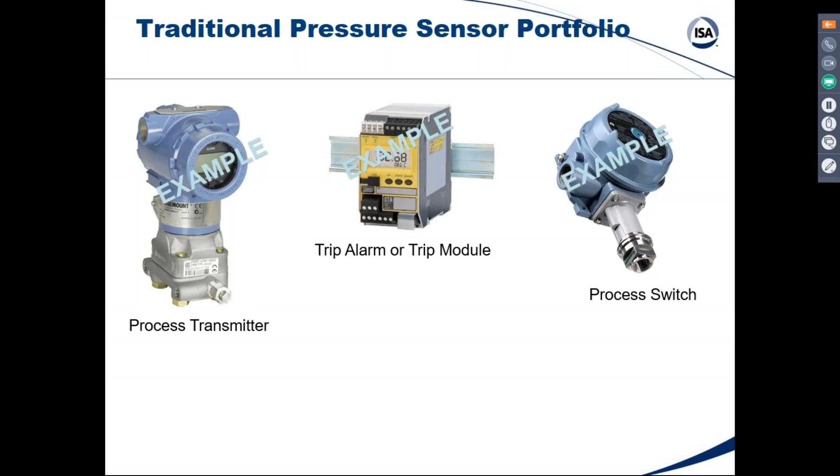So we might begin this discussion by giving some examples of the traditional sensor portfolio. It might be a process transmitter, it might be something like a process switch, it might be a trip alarm or a trip module. So you can see in just these three products alone the building blocks of a critical loop. We won't go into the final elements because our focus here is on the sensor part.

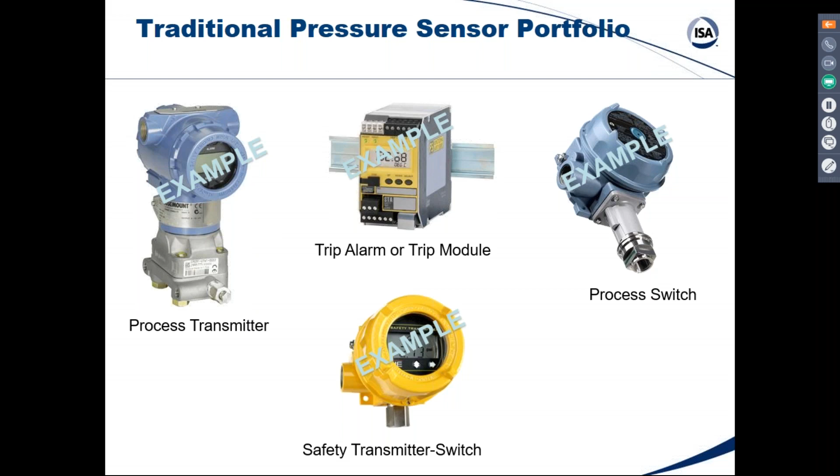Today's topic specifically is about this safety transmitter switch, or this hybrid. What you call it has been something of a head scratcher too, because customers are usually thinking either of process transmitters or switches, not the combination of one in the same kind of footprint. I think several years ago one of our competitors came out with a product like this and called it a hybrid, and it seemed to be a good way of representing it.

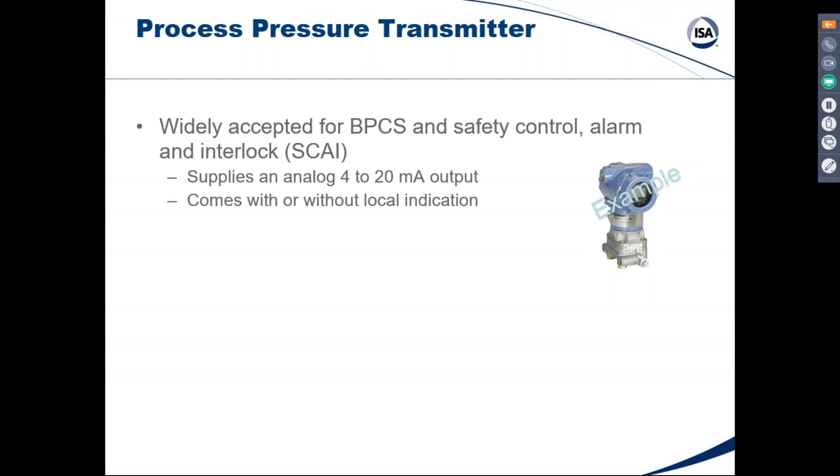So if we look at just the process transmitters, they're obviously widely accepted in basic process control and in this area called SCAI, safety controls, alarms, and interlocks. They supply a 4 to 20 milliamp output as the input to the critical loop. They come with or without indication, and the interface or integration is dependent on that central logic solver. The attention to setting it up, commissioning it, making sure that configuration changes are intended and not unintended, and the issue of proof testing is something you have to take care of.

They're SIL capable—if you look on the safety automation equipment list, for example, that Exida hosts, you'll see a lot of process transmitters up there. They've been around long enough so they meet this criteria that the functional safety standards have defined called prior use, but there are certified versions as well. The newer versions of these process transmitters have dealt with the issue of frozen impulse lines, because that used to be a concern—and in fact it's still a concern, because there's a huge installed base of transmitters that still can't detect frozen impulse lines. You get a frozen 4 to 20 milliamp signal, and it can be very dangerous.

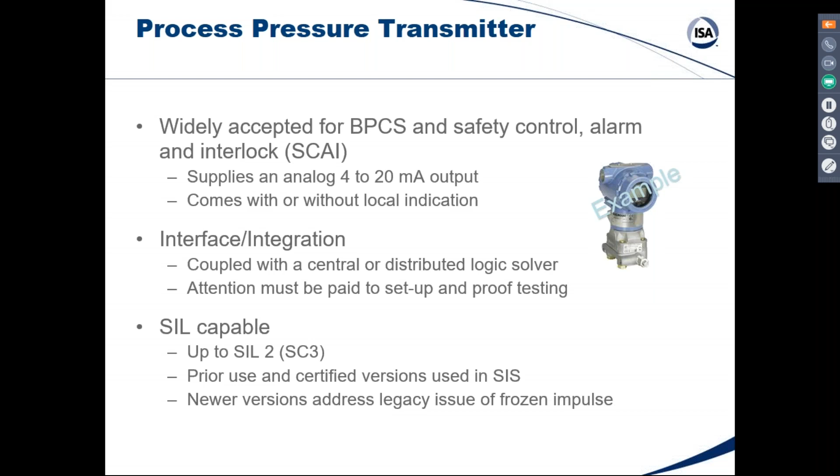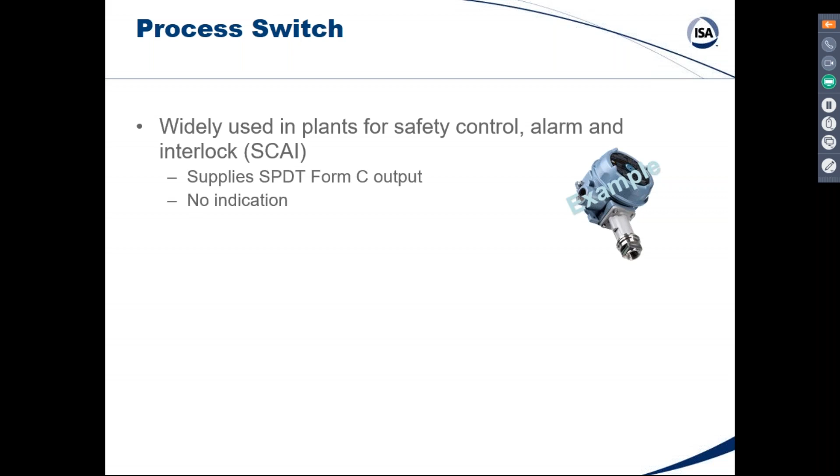All right, so now we go to the switch. Again, widely used in safety control, alarm, and interlock, not as much in basic process control. In this case, a Form C output, single pole, double throw, using traditionally a micro switch, with no indication.

The interface, the integration is discrete to the logic solver or to some final element directly, because it has the capacity to handle the final element kind of switching. Same issue with setup and configuration—it takes attention to detail. In this case, a few more wrenches, and probably an equal amount of time, if not more.

These devices are SIL capable now. Like many devices, electromechanical and solid state, they have met the requirements of the functional safety standards, which combine not only the manufacturing process and the development process, but also the implementation of the design and development. So you'll see SIL certified electromechanical switches now on that automation equipment list.

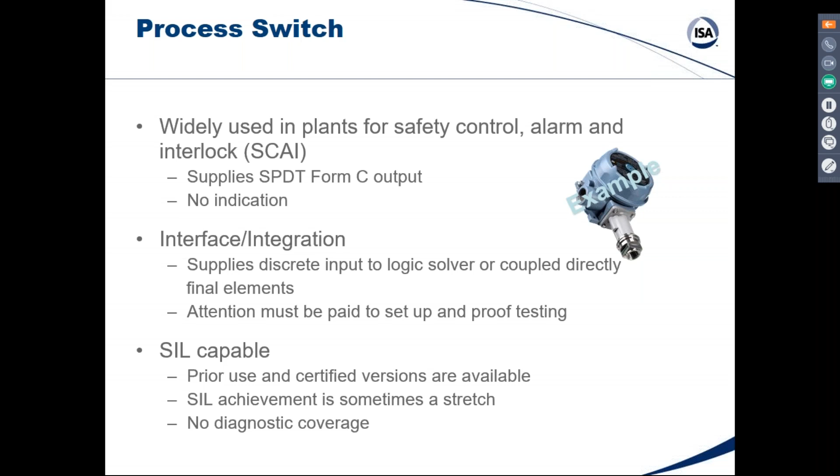As far as this trip alarm, trip module, same thing—SIL implementation using sometimes analog inputs and digital outputs with or without indication. Those safety trip alarms require more environmental protection generally, so it's got a different environmental profile than does a process transmitter or those switches.

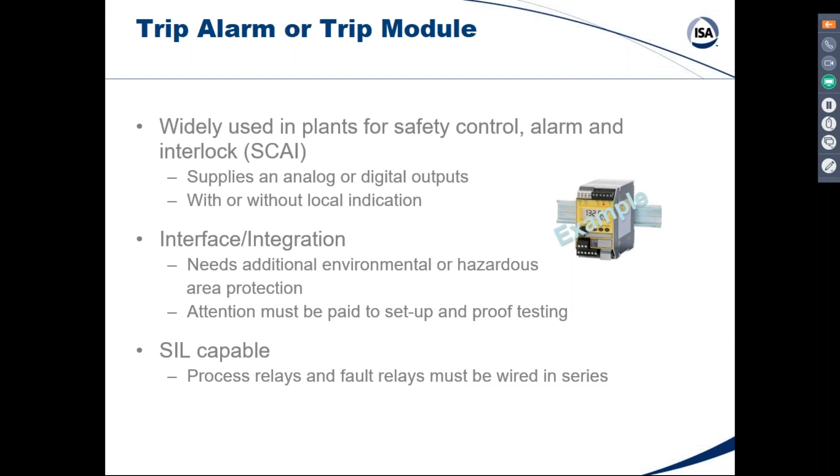And they are SIL capable, with a footnote—you've got to monitor that process output with a diagnostic output. And it's not automatic. It's something that has to be implemented.

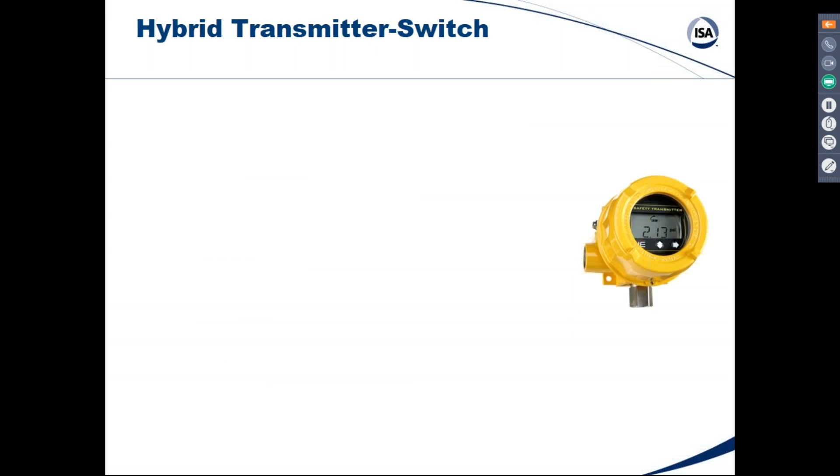Okay, so now we move to the topic today, which is this hybrid idea that you could squeeze some of this together in one footprint. This is, as best I can describe, an emerging niche. Not all customers will implement a device like this in a full-blown safety automated safety instrumented system. So this word niche has come up a lot, and I've heard big operators use it to describe ways in which they think this can be used very effectively to protect certain loops.

It combines the functions of a transmitter and a trip alarm. It does so with indication. It can be coupled to the logic solver, or it can be powered externally. So it's got that flexibility that a process transmitter doesn't.

It is SIL capable. So the one you're looking at right there is certified to SIL 2 with SIL 3 capability. And we've gained this prior use acceptability with this particular design as well—so that route, what they call route 2H. And it has automatic self-diagnostics. So the manufacturers of hybrids are paying attention to this imperative for diagnostic coverage.

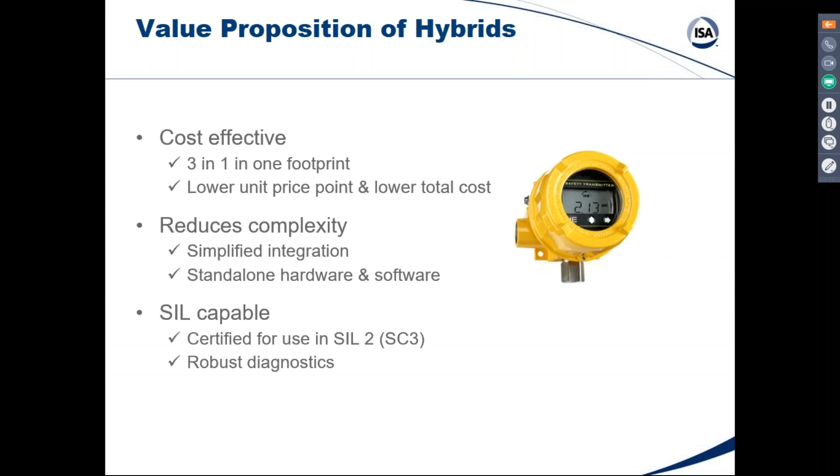And same thing with the users, right? They want some objective way of implementing stuff, sometimes quickly, sometimes without the type of prior use validation that is demanded. And so being able to lean back on a device that's been certified to the functional safety standard is an important path.

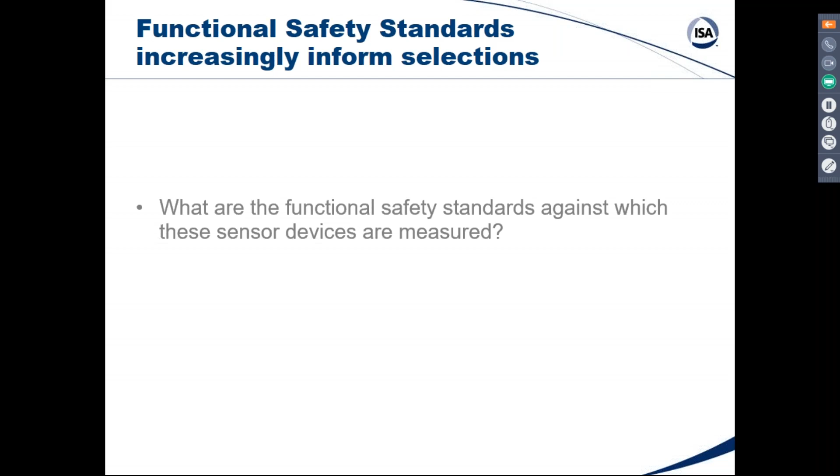Okay, so let's just talk about that for a minute—the functional safety standards against which these devices are measured. So it's both a qualitative and a quantitative assessment, really.

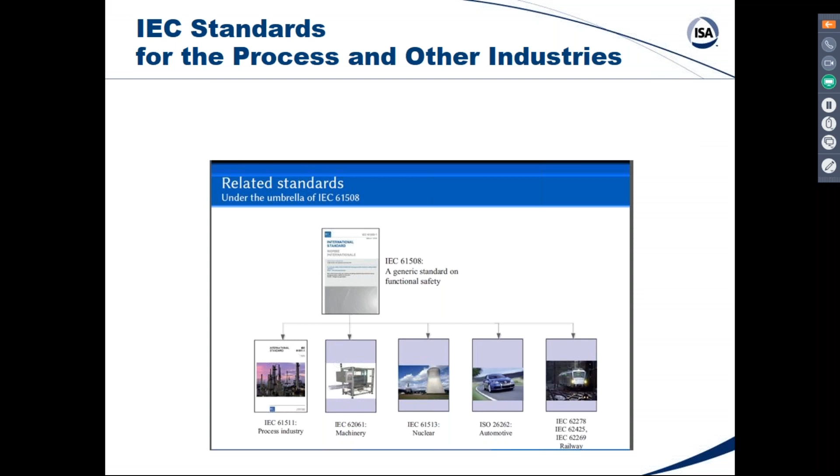They focus on that using something that's equivalent to a safety instrumented system called a safety-related electronic control system, usually this SRECS, which a lot of manufacturers, refiners, for example, or compressors, or other rotating equipment might look to. I've seen fewer examples of that in the safety machinery area, but I think it's probably coming.

All right, ISA also has standards. In fact, when IEC was developing 61508 many years ago, ISA was too, with this companion standard called ISA 84. IEC got to the finish line first, I guess, in terms of publishing it, but the ISA folks, the committee that developed the 84 standard, had put a lot of work into it as well, and saw the wisdom of harmonizing these standards.

And so this got published as ISA 84 back in 2004 in its first edition. And it's the same as the IEC 61511 standard, with the exception of a grandfather clause.

And this is being updated as we speak. The ISA 84 committee meets next week in Houston, and they've got several working groups looking at different elements of functional safety, fire and gas systems, and this notion of SCAI, safety controls, alarms, and interlocks, and the standard that applies to that, and others. That's ISA's contribution, which is significant and continuing.

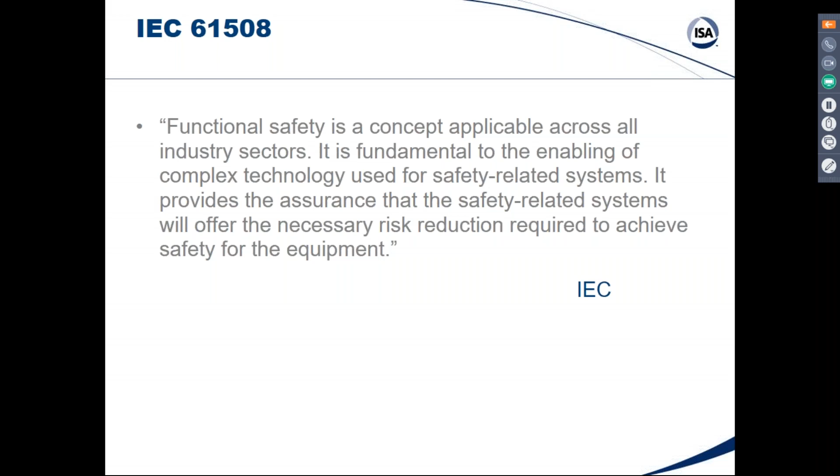If we kind of summarize this idea of a process sector standard, this one that governs electronic and programmable electronic devices, functional safety is a concept applicable across all industry sectors. It is fundamental to the enabling of complex technology used for safety-related systems. And it provides the assurance that these systems will offer the necessary risk reduction required to achieve safety for the equipment. That's the committee's words.

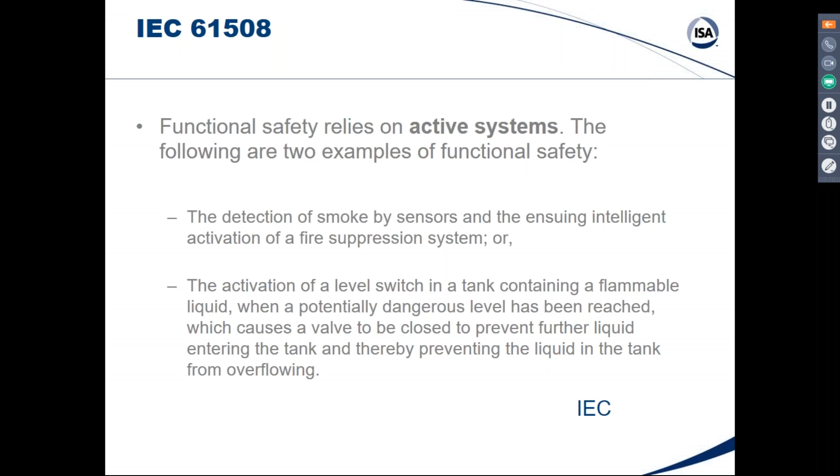And they deal with active systems, not passive systems, right? So the detection of smoke by sensors would be an example. The activation of a level switch would be another example. Active system. So these are the standards against which these devices are measured.

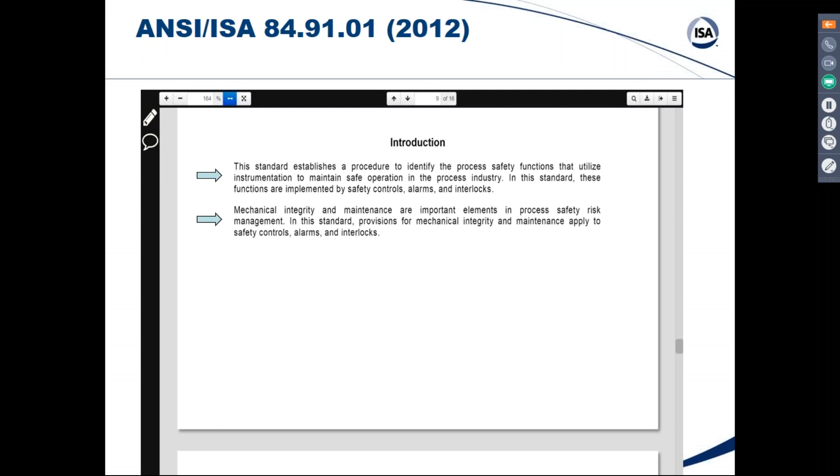The standard establishes a procedure to identify the process safety functions that utilize instrumentation to maintain safe operation. And they call this SCAI, Safety Controls, Alarms, and Interlocks. So this is a discussion separate and apart from safety instrumented systems. This is everything else in that instrumented world that's easy, I suppose, to overlook in a plant. And the concern about mechanical integrity and maintenance of those systems, those instrumented safeguards.

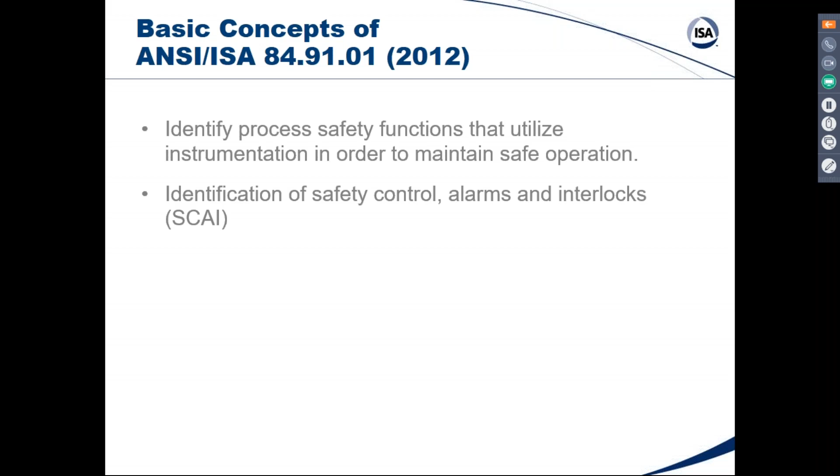And in that standard, I'll go over the basic concepts and then show you a little diagram. So just in summary, to identify process safety functions that utilize instrumentation to maintain safe operation. It's called SCAI, Safety Controls, Alarms, and Interlocks, including SIS and emergency shutdown. That'll become clear in just a minute. And it's focused on the mechanical integrity and maintenance as the gateway to improved managing of process risk, improvement.

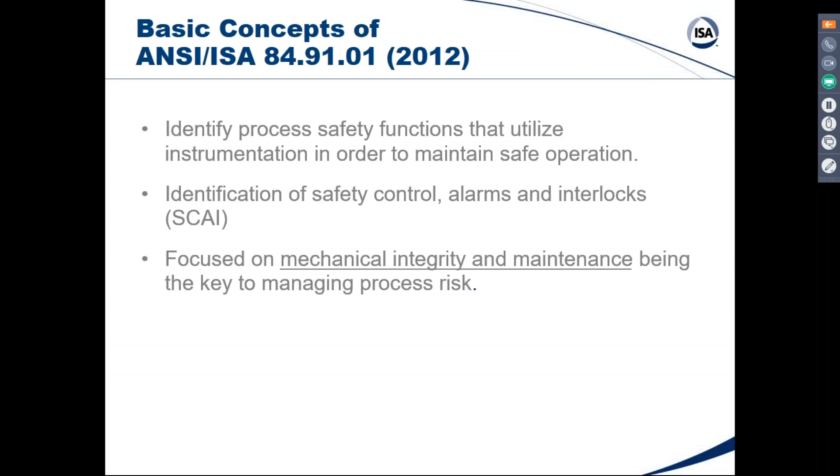Again, this is only a 16-page standard, but it sort of calls attention to these process safeguards apart and separate from the functional safety standards, S84. So this whole laundry list on the right, safety alarm, permissive, safety critical control, safety interlock, safety instrumented systems. So this is merely a subset among this whole group, emergency shutdown, detection and suppression.

Now this is good news for manufacturers of switches because, apart from safety instrumented systems, this is where a lot of work is done, through all manufacturers of these building blocks of a loop, right?

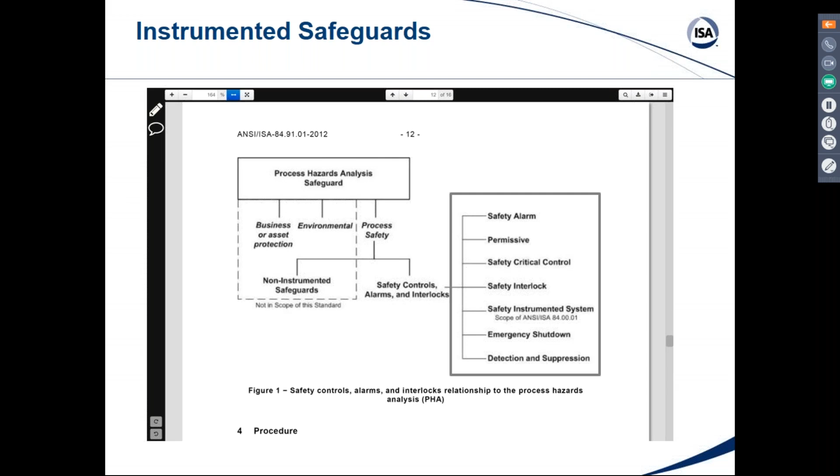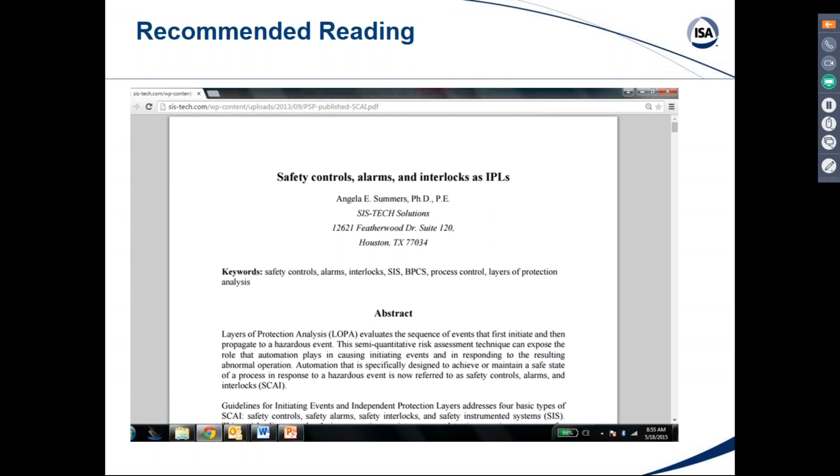And Angela has written about this in a good white paper she's published called Safety Controls, Alarms, and Interlocks as IPL. So she wants to integrate this discussion of SCAI with the notion of independent protection layers, which is what they are, really, if they're implemented properly. So I would recommend looking at that because it's a really interesting white paper where she explains the ways in which basic process control is implemented.

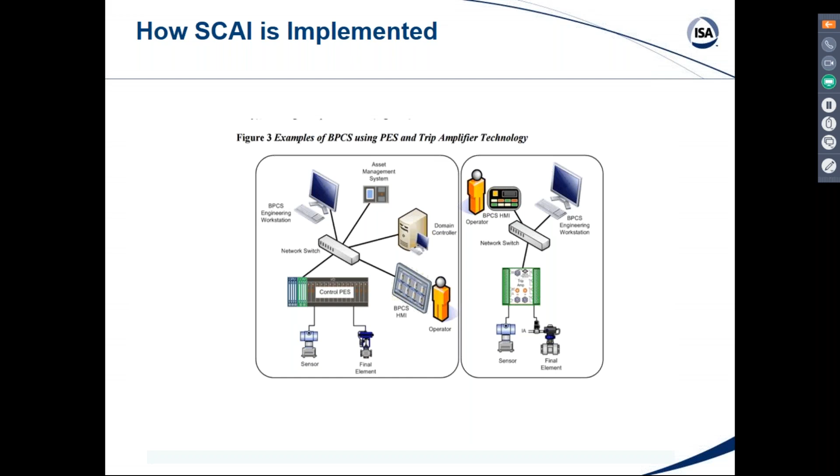So here's a typical loop, right? Sensor, control, logic solver, final element on the left, and on the right, this trip amp that we spoke of. Sensor, trip amplifier, final element. That's in the BPCS world. Same thing is true in safety instrumented systems. Sensor, logic solver, final element.

Same thing over here. And we have a lot of chemical and petrochemical plants coming to us talking about this implementation, which is sort of the poor man's way of implementing SIS, because it's more distributed, less expensive, more local. But it's still considerable, a considerable effort, because you're not free from the obligation in a safety instrumented system of implementing everything that a full-blown safety system would involve.

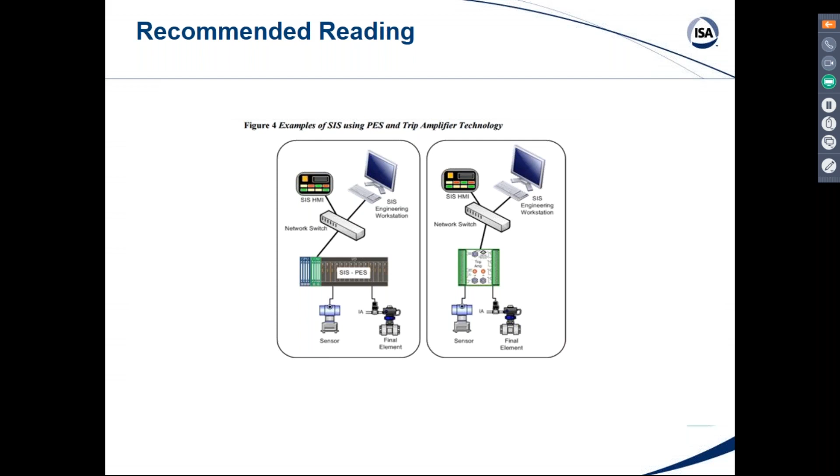That's recommended reading. To summarize what Angela says, when considering the use of basic process control systems for SIS, for those process safeguards outside but to include the safety instrument system, the first thing to remember is that risk reduction ain't free, and getting an order of magnitude risk reduction is hard.

The independence and reliability requirements impose rigorous design and management practices focusing on eliminating single points of failure and human error. So it's looking at the systematic errors, it's looking at the design considerations.

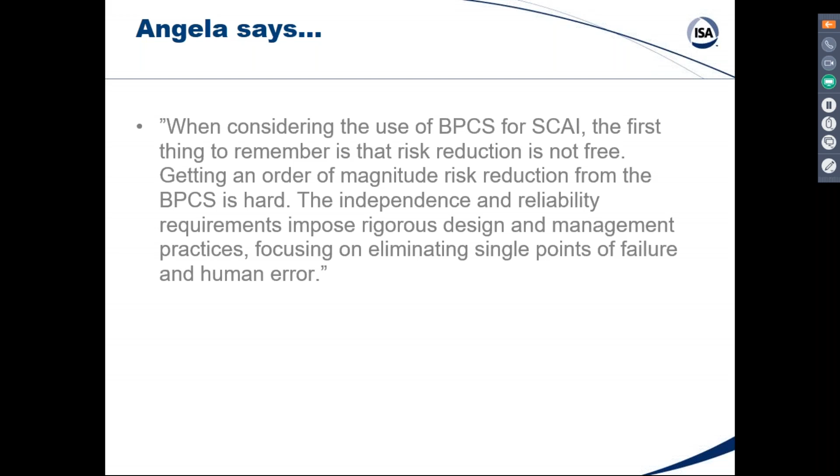When claiming more than one order of magnitude from a single controller in a scenario, the controller must be designed and maintained in compliance with the process safety standard, the functional safety standard.

If you were advising new people on this topic, and you threw the 3 parts of the functional safety standard at them, that would take them several months to get through and understand. This standard on SIS is 16 pages, but it deepens and broadens one's view of this whole topic.

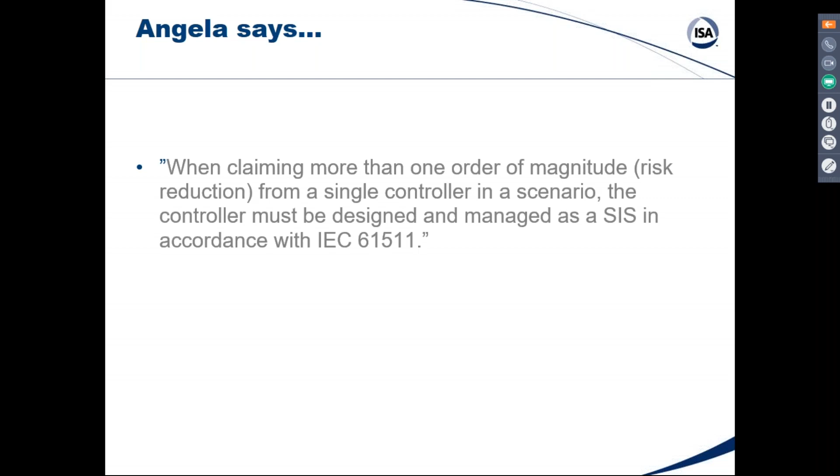There's an awful lot of landscape out there that doesn't include a dedicated safety instrumented system that has to be taken care of, has to be maintained, because it can put a demand on the safety system, and that's the concern, right? When it doesn't work upstream of the safety system, that's a problem, because it places demands on the safety system.

Okay, so we're now going to take a look at just a typical, maybe traditional recipe distributed SIS involving some of these sensor components that we talked about. So a process transmitter, trip amplifier, safety relay, commanding a final element.

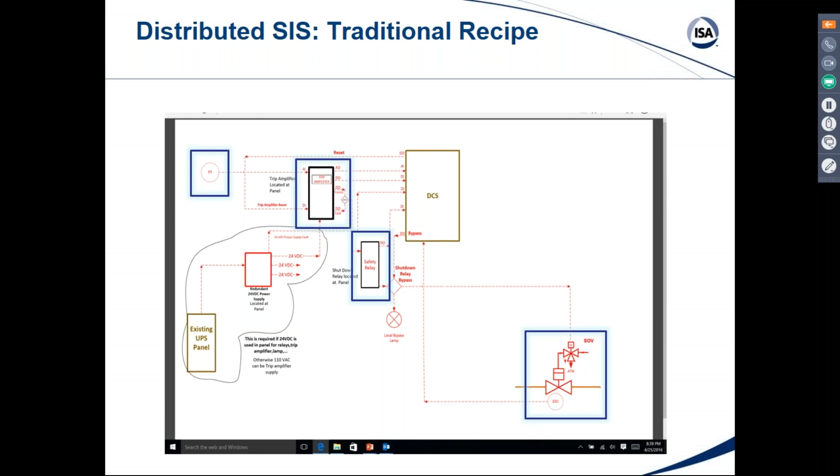This was given to us by an EPC in California that had looked at hybrids and said, well, that's kind of interesting because I know what the traditional architecture looks like, and I know what it costs both to implement and to maintain.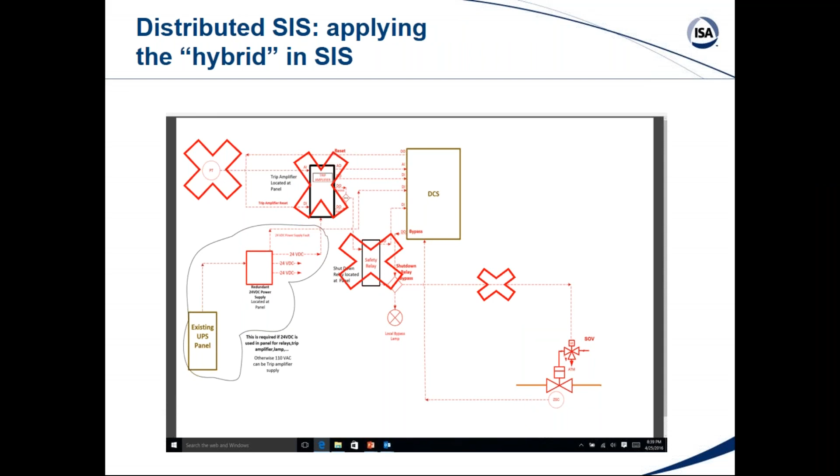The idea is that you can get rid of the process transmitter, he was saying. You could get rid of the trip amp, you could get rid of the safety relay, you could get rid of the wiring, some of the programming, by implementing this hybrid, which can not only supply a 4 to 20 milliamp output, but it can command the final element using its digital output, which in this case is a relay that's high capacity. It could be either an AC relay or a DC relay, all in this little package, which is about the size of a typical process transmitter.

It can even supply, for those that are using turbine controllers with that black start standard 125 VDC, it can even supply a switched output at this electrical standard. So it's pretty flexible.

Now in the case of this hybrid, these are 3 different model numbers, but everything else is the same. It's programmable logic, combining the notion of a switch, a logic solver, and a transmitter.

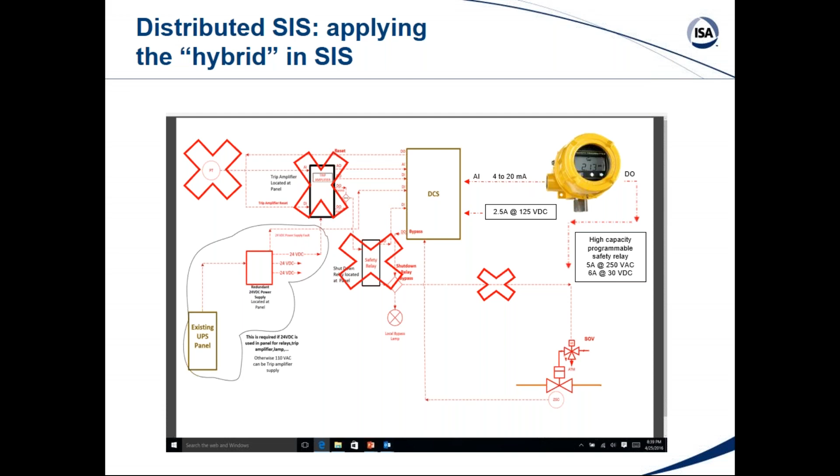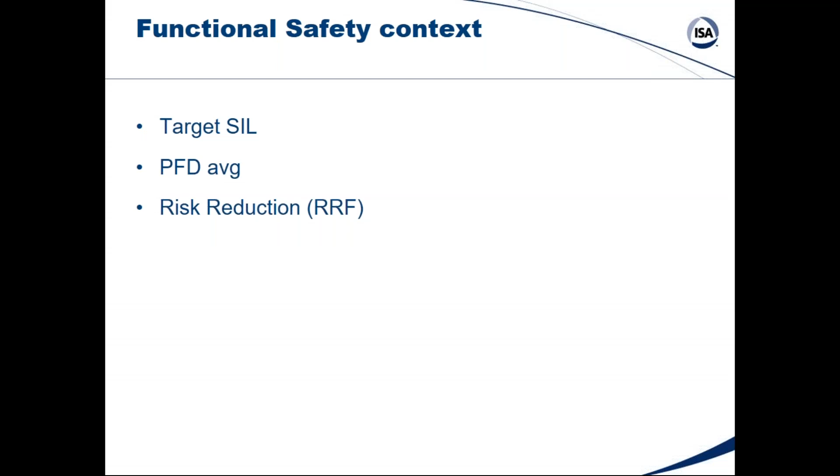In a functional safety context, we look at target SIL, we look at PFD average, we look at risk reduction factor, and now let's take a look in this context and in the context of hybrids and other devices at a theoretical SIF.

This really came out of an earlier SIL verification summary that I was familiar with, this modeling of devices in a high pressure protection SIF, and that's the description of the SIF: measuring steam pressure in the boiler output header and opening a vent valve.

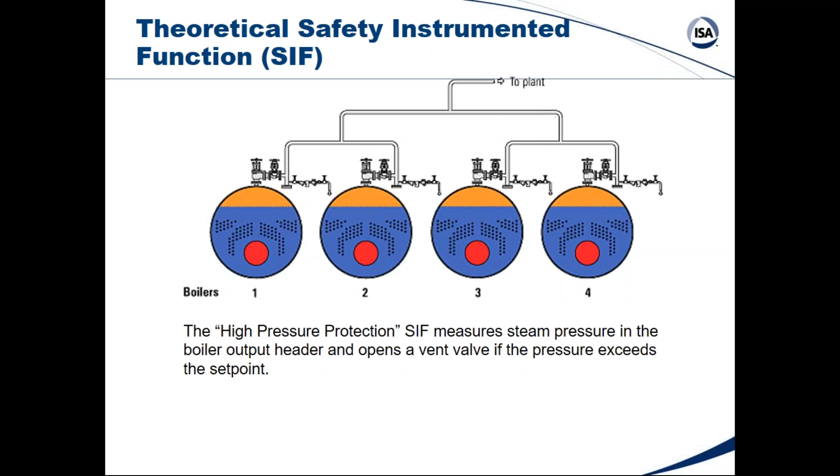And if we look at the sensors, these are the assumptions. The sensors in this modeling were either certified process transmitters or this hybrid of a transmitter and a switch.

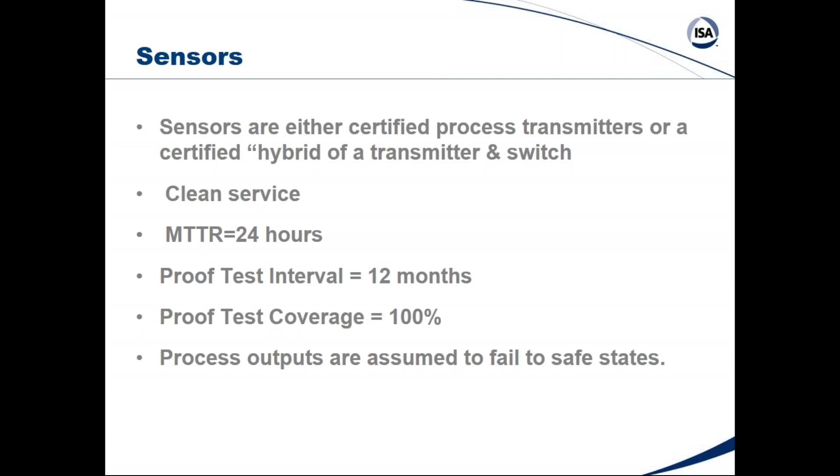In clean service, the mean time to restoration was given as 24 hours, proof test interval of 12 months, proof test coverage is assumed to be 100%, unrealistic, but this is theoretical modeling, and the process outputs are assumed to fail to safe states.

The logic solver was a generic SIL2 or SIL3 logic solver, mean time to restoration 24 hours, proof test interval 60 months, extended out as you can see, and proof test coverage again assumed to be 100%.

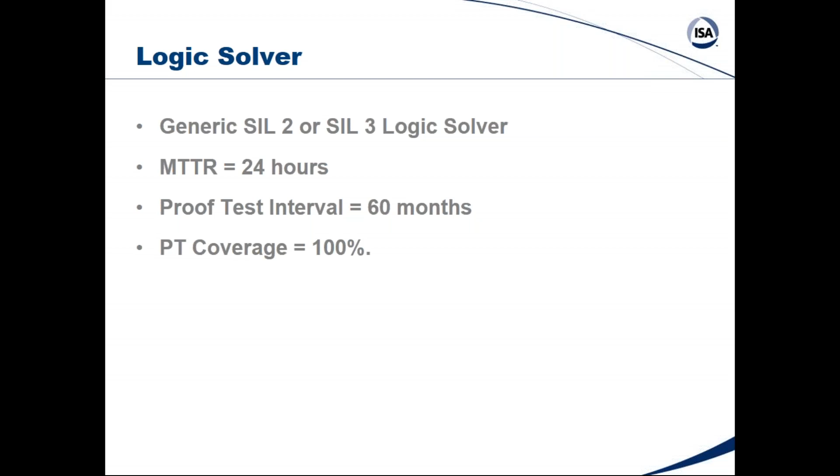The final element in this modeling was a generic three-way solenoid valve, a pneumatic spring return actuator, an EZ valve, a mean time to restoration of 24 hours, back to the 12-month proof test interval, and proof test coverage that was assumed to be 85%, and no beta factor.

So the beta factor is that common cause burdening that is applied where devices of similar manufacture, similar design, are used.

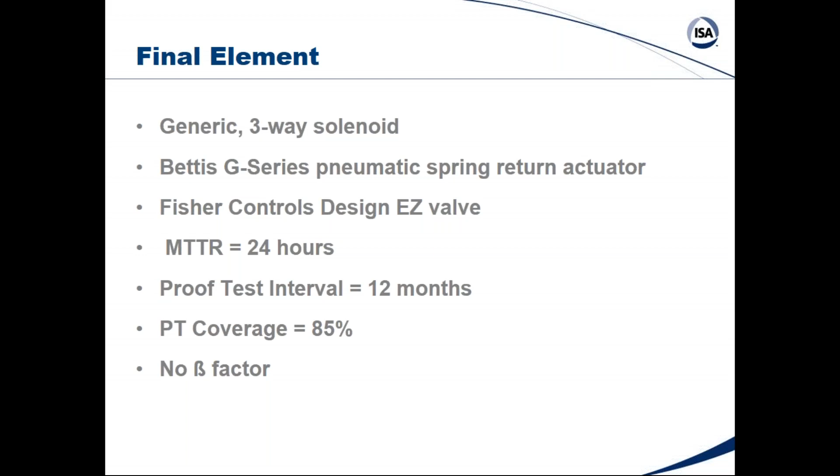So this was what Exida had set up as a theoretical SIF, and the simplified equation is the probability of failure on demand average is equal to the sensor subsystem PFD average plus the logic solver PFD average plus the final element PFD average.

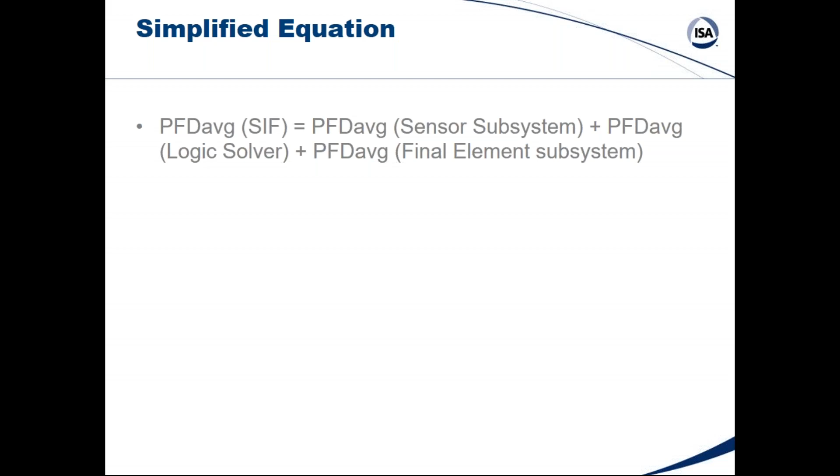Now let's bring this back to the actual devices, some of which we have looked at. This comes off the safety automation equipment list. If you go look at that Exida list of certified instrumentation, there will be a description of the device, a statement of the safety variable output, and the architectural constraints. These all come off the certificates. And then in the case of these process transmitters...

The 4 to 20 milliamp output has this PFD average. And if you look down here where this hybrid is, this likewise would have a PFD average for the 4 to 20 milliamp output. But we're not interested in that comparison as much as we are with what the relay does. It's interesting that when you sum up the PFD averages of the analog outputs...

And you jump here to the PFD average for the safety relay, as we described in that hybrid architecture, the risk reduction jumps here by twice. And actually gets to SIL 2. So the question is, why does that happen?

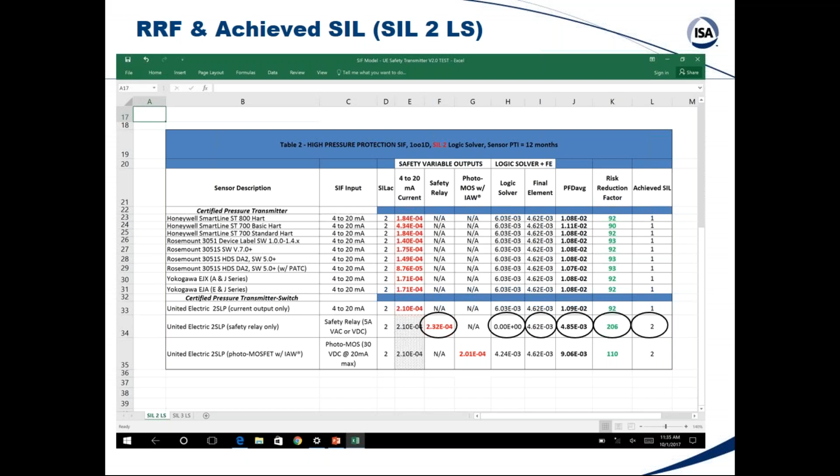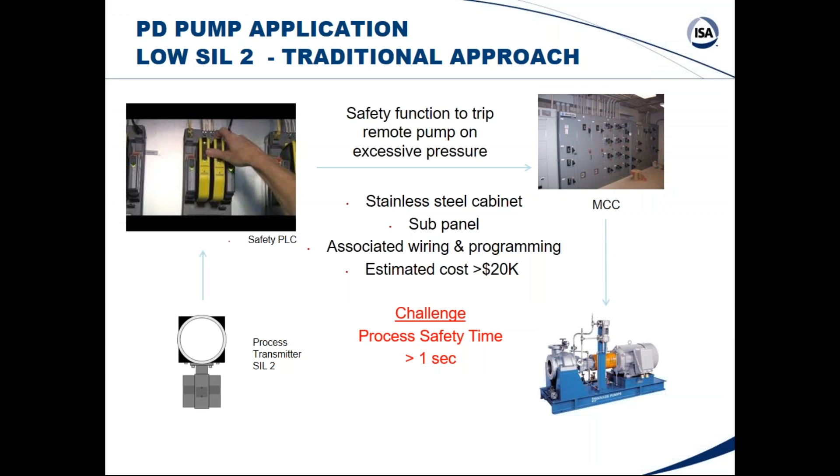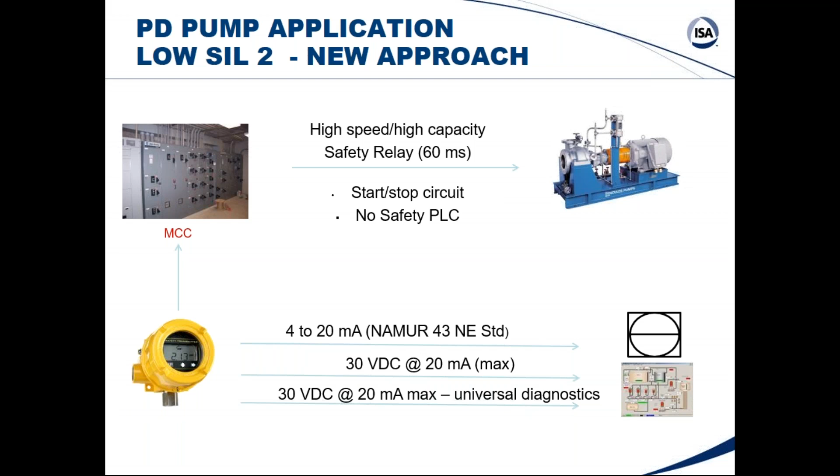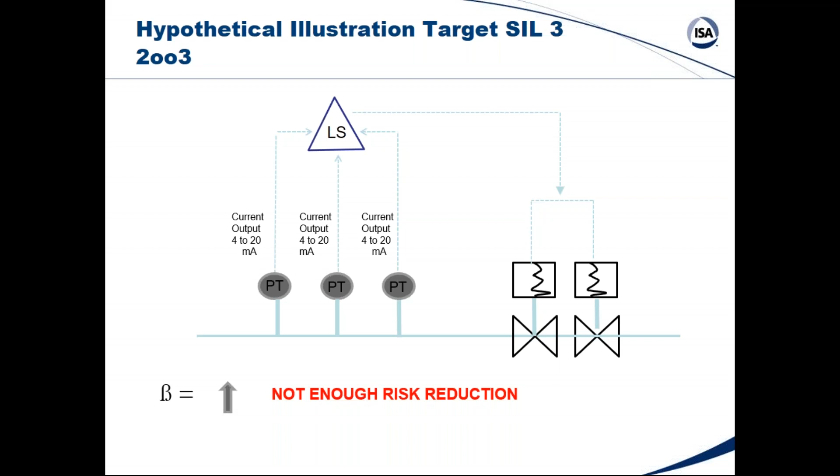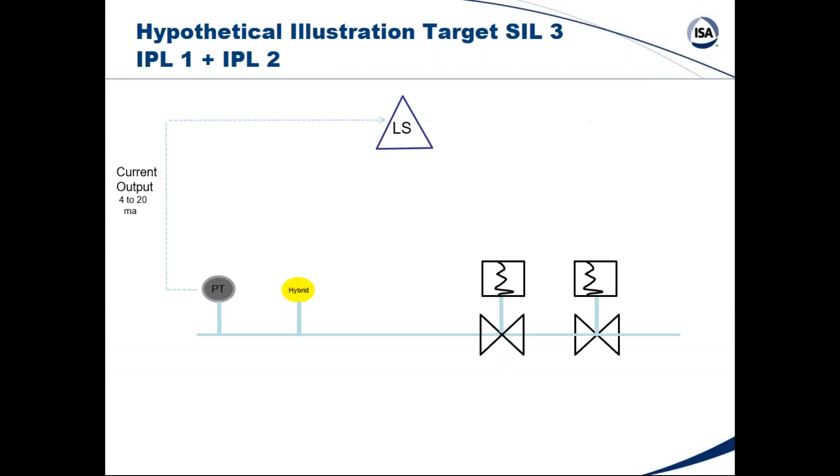I'm a little out of order here, but this is what I wanted to show you. The idea is, if you were to put in the hybrid and use the safety relay output from the hybrid, maybe you could justify this as an independent protection layer. That was the notion. And call the other loop another independent protection layer, IPL2.

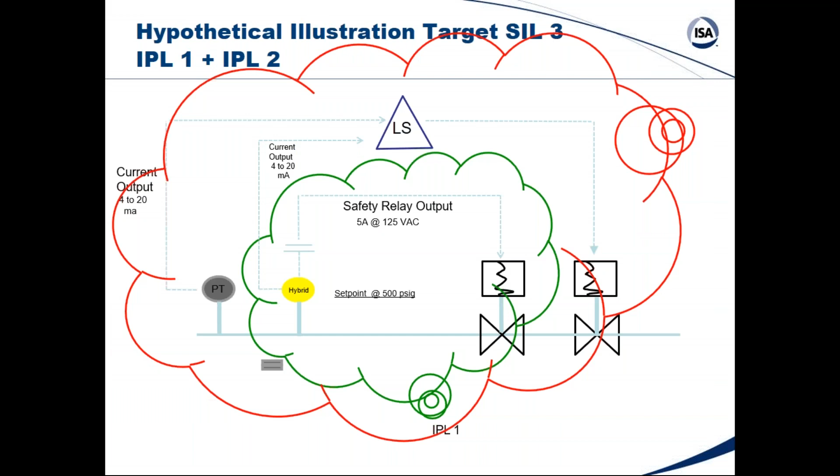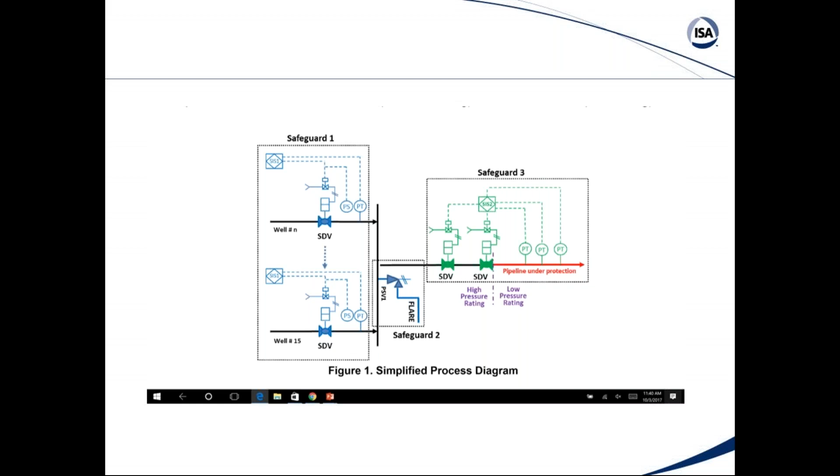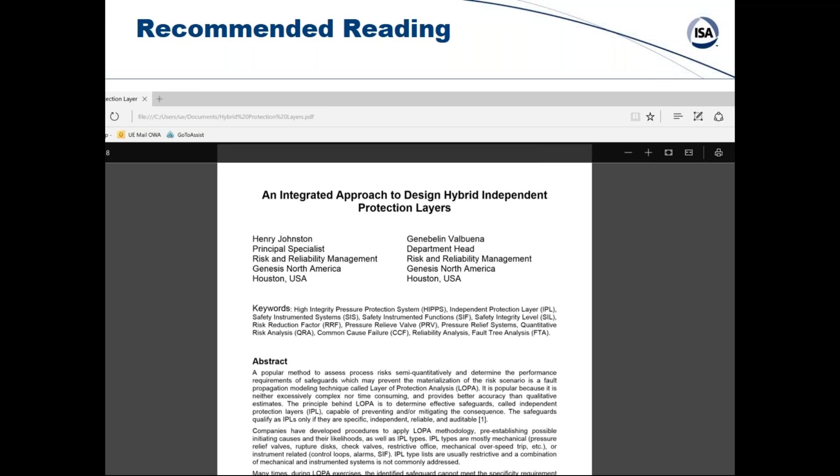So I would recommend that paper as well. Again, only parts of it really relate to this hybrid argument. And when he uses hybrid here, he's speaking of it in a larger context, not just our device or a device that's a hybrid.

I'll skip ahead. This is just a chart meant to do a rough comparison of attributes. So the hybrid we've been talking about has these kinds of specs: a very high safe failure fraction, 98.6, safety accuracy of plus or minus 3%, fault detection time very rapid, 6 seconds. These safety variable outputs in this hybrid, every one of them is qualified by Exida as a safety variable output. That in itself is quite unique, and it invites some flexibility.

This is a very, shall we say, high-end process transmitter. The safe failure fraction is 95, plus or minus 2%, 30-second fault detection time, one safety variable output, the analog 4 to 20, and a similar environmental profile.

So these come off the FMEDA of these devices. The trip alarm we spoke of, diagnostics not quite as robust, 2% safety accuracy, 15-minute fault detection time. This footnote assumes that the fault relay is wired in series with process relays for fault monitoring, and a pretty optimistic mean time to restoration.

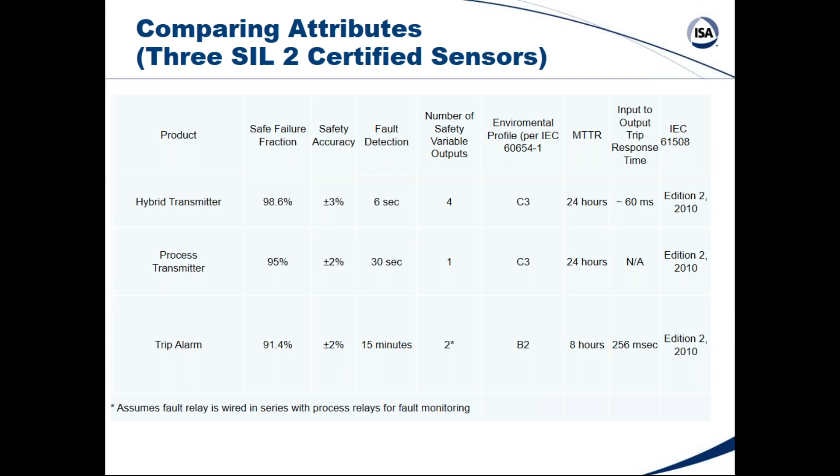Wrapping up here, the question is, can hybrids address common cause? This was a good report that came out in May of 2015 by SINTEF, whose clients mostly are, I think, North Sea clients. It was about the subject of common cause and beta factor.

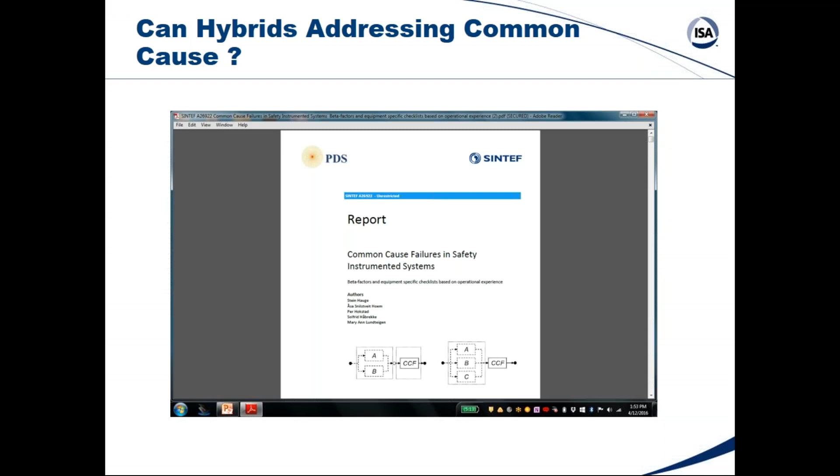And if we jump to one of the summary pages, we see this list of equipment, these major equipment groups. This SINTEF report was based on actual field failures that could be attributed to common cause. Again, common cause being that phenomenon of a device of common design, common manufacturer that would fail in a similar mode.

And these beta factors over here come out of the older handbook, and are informed oftentimes by manufacturers, giving a beta factor of 6% for process transmitters. But the new beta factor they're recommending based on these failure reports is much harder, it's 15%. So they consider these figures over here to be very optimistic.

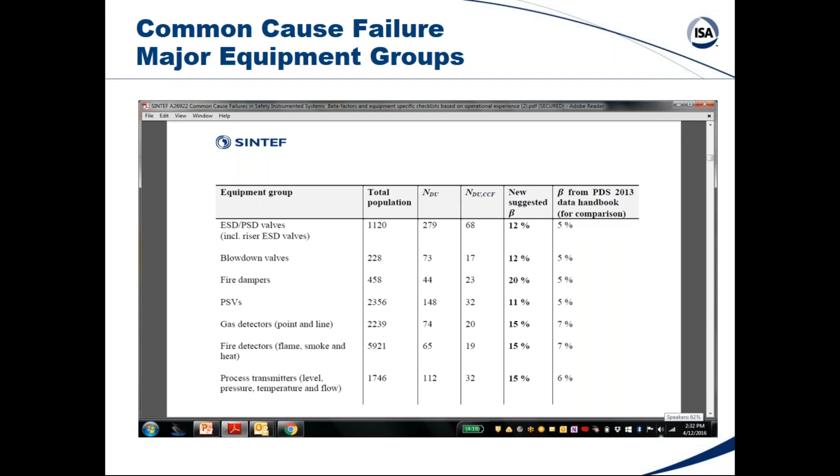And this is a factor that you would apply to the PFD average on the question of SIL achievement. To my audience, I apologize for walking in front of the screen.

Summarizing the benefits of hybrids: highly distributed SIS, where full-blown safety systems are cost prohibitive, where ESD and continuous monitoring are needed in combination, where process safety time thresholds cannot be met—the relay and the programmable logic on the hybrid is going to be faster than that processing that goes on through a loop, again, depending on the loop—and where diversity can reduce common cause.

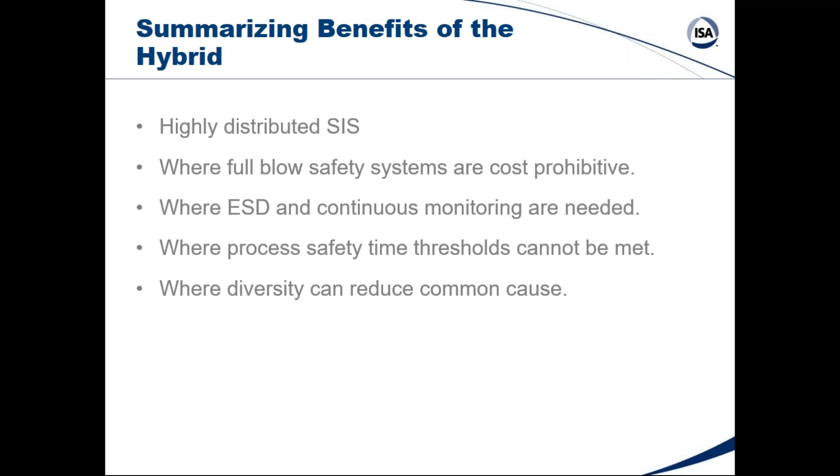Finally, cost is a big consideration for a lot of users, and the argument here is that lower unit price points for the certified devices are desirable, and total cost solutions are imperative, and that's driving a lot of interest.

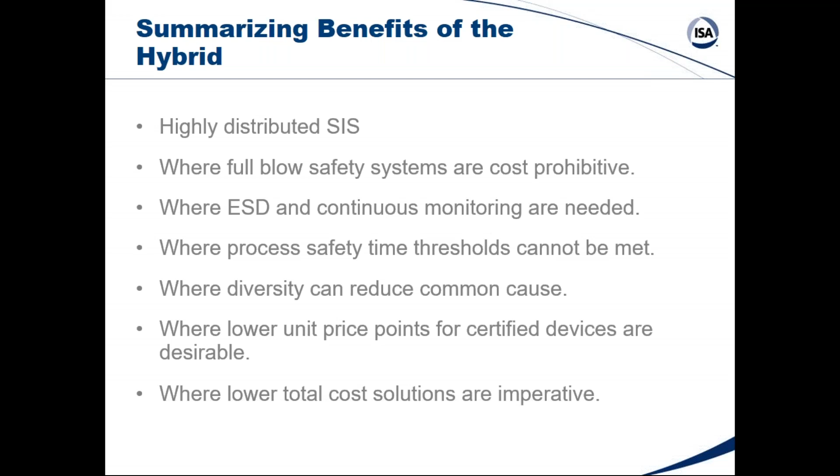And I thank you for your attention. Any questions I can answer? I'm happy to.

Approximately, the price difference between a regular transmitter and one that's a hybrid: the hybrid I'm speaking of is about $1,000 list price, and I think most of the certified SIL2 process transmitters would be $2,500 or higher. We have a sample of it back there, so you can get an idea of what it looks like, and literature.

Any other questions? Yes, Arthur. On the programming part of it, how actually do you physically program it? It's done through a keypad, so it's a class 1 div 1 enclosure, but you remove that cover, and the programming is done on a keypad. The setting of the set point, the deadband where it resets, and other parameters—like you can put in a digital filter to filter a spike.